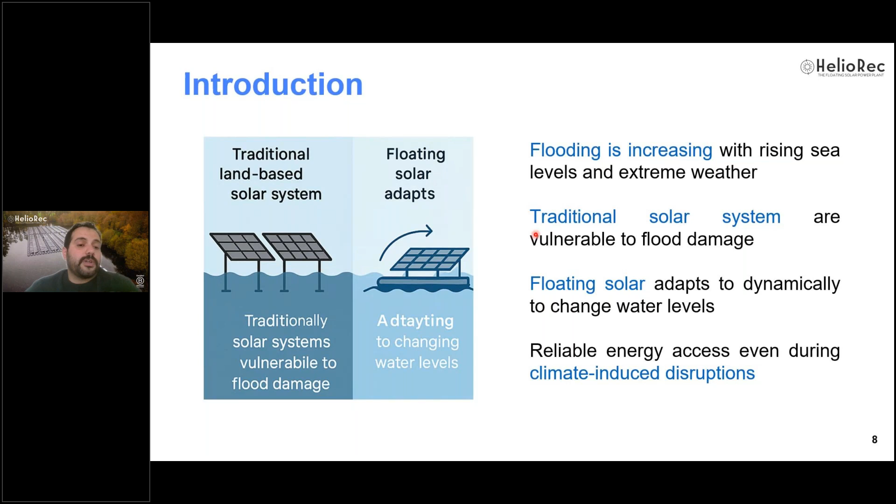So in fact, as climate change accelerates, we are seeing more frequent and intense flooding, especially in coastal regions. So that poses a serious threat to traditional energy infrastructure, including land-based solar installations. Whereas floating solar flips the script by using water surfaces, where these systems not only save land, but also adapt to water level changes in real time.

HelioRec floating platforms are designed and engineered precisely so they remain stable and operational during severe floods, ensuring uninterrupted power delivery. So briefly in today's presentation, what I want to present is a real case from the real world application of one of our projects, where we were able to produce clean energy in harsh conditions.

So in January, a couple of months ago, Storm Herminia unleashed record-breaking rainfall and severe floods that hit the region, mainly the Brittany region in France, where Rennes has experienced one of its worst floodings over the past 40 years. During that historic flood, our HelioRec platform, as you can see here in the red circle, remained fully operational, delivering uninterrupted electricity. That's real-world performance that highlights the resilience of our innovative floating solar technology.

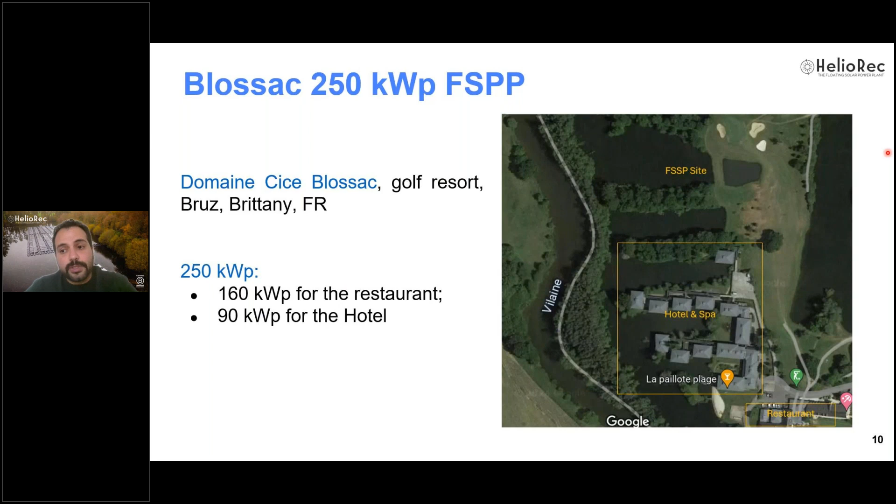Talking about the project itself, it's installed in Domaine Cice Blossac, a golf and hotel resort located in the region of Bruz in Brittany. The platform is 250 kilowatt, divided to supply the restaurant and the hotel of that place. The project was commissioned in October 2024, last year.

As you can see in this beautiful photo, the platform consists of the power plant with the floaters and the panels, the walking path and access bridge, and also floating electrical equipment which includes AC boxes, DC boxes, and inverters.

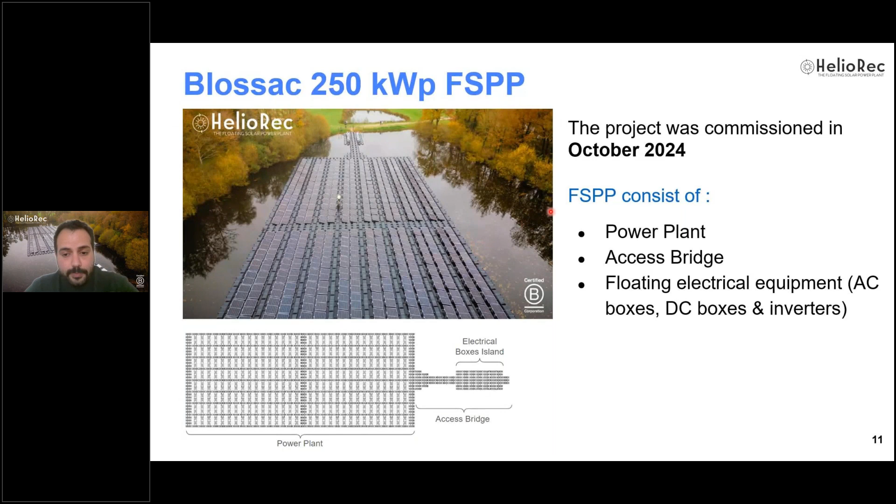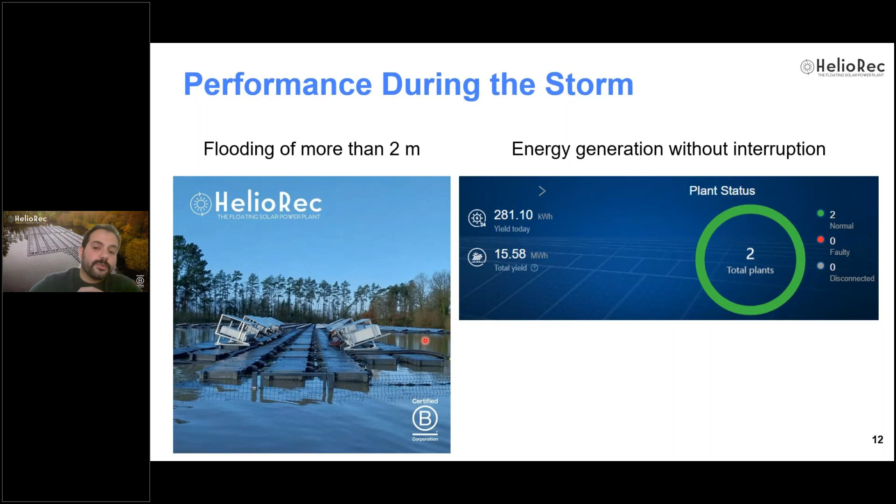Talking about the performance of that platform within the storm we mentioned before, despite the severe floods, a 2 meter flood on our platform, it stood strong. As we can see in this photo where the side gate is fully submerged with water, our floating solar power plant continued to produce energy without any interruption, and performance remained stable throughout that storm.

So I want to talk now about the main key technical features that allowed us to have this performance within that storm. But before I go to that, it's worth noting factors that already played a good role in the resilience of the system.

It's important to mention one important thing and give the essential credit that belongs to the proper design of the floaters themselves. Our floating solar system is certified with the Approval in Principle certificate by Bureau Veritas, and the main components and subsystems of our floating plant follow the recommended practice from DNV.

Coming back to the key technical features, one of the main key features is the environmental and site assessment before doing any project, which is the meteo data analysis. In that specific project, considering Eurocode 1 with a 25-year return period, the fundamental values are assumed for the basic wind.

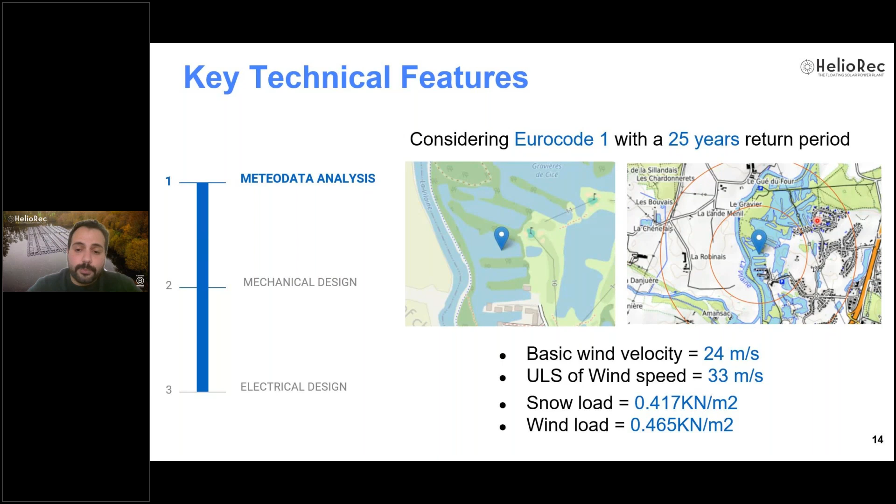The ultimate limit state of wind speed, snow load, and wind load are as shown here in this slide, where these conditions need to be taken into consideration within the design phase for load analysis, mooring design, and buoyancy verification.

The second key feature is the mechanical design of the platform. As you can see in the schematic shown before, here it's a top view of the plant showing the arrangement: 8 dual rows of floaters and 31 columns, split into 16 columns on the west side and 15 columns on the east side of the plant, separated by one column of a big footpath.

Moreover, the external rows and columns have also been designed using the footpath, the walking path, in order to increase the stability of the plant.

Moreover, the taper that you can see here, from the plant itself to the access bridge, this tapered transition has been chosen in order to strengthen the structure and mitigate any excessive lateral forces.

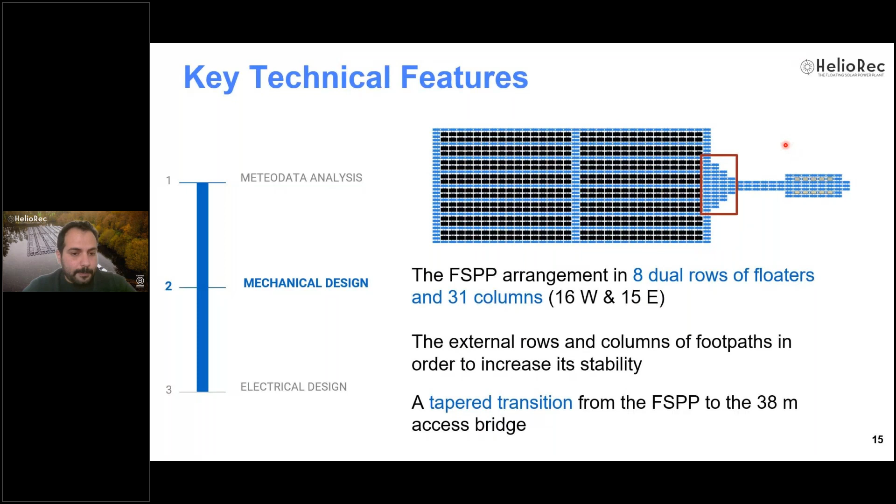Another important point in the mechanical design is considering the output, based on the output illustrated before from the meteo data analysis, where load analysis has been carried out using CFD analysis in order to understand the total load of the system and the total load it will be subjected to.

So the addition of all forces, shown here through the lines, the addition of all forces acting in a single direction across the plant is equal to the addition of the individual forces in each column.

So for example, the total load acting from the north-south of the plant is almost 58,000 Newton, including the forces on the access bridge, which is 2,800. A similar analysis was done for the east-west, west-east, and south-north directions. Following that, 36 ground anchors were distributed across the north, south, and east border of the lake, as shown in this schematic illustrating their position relative to the plant.

For the west-east direction, there was a small incidence of winds, less than 3 to 4%. Also, we didn't position any mooring anchors since the lake didn't have a border on its west side. That means any potential loads in that direction are taken into account by the ropes on the north and south borders, with an angle, as you can see here.

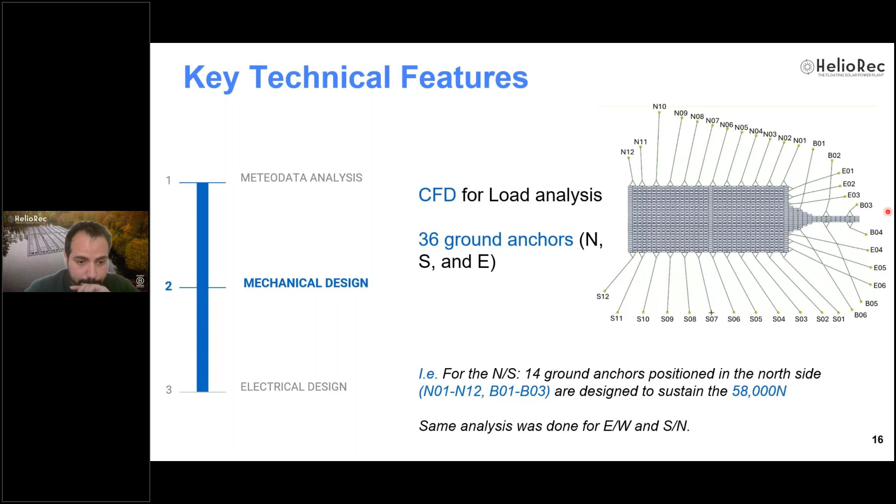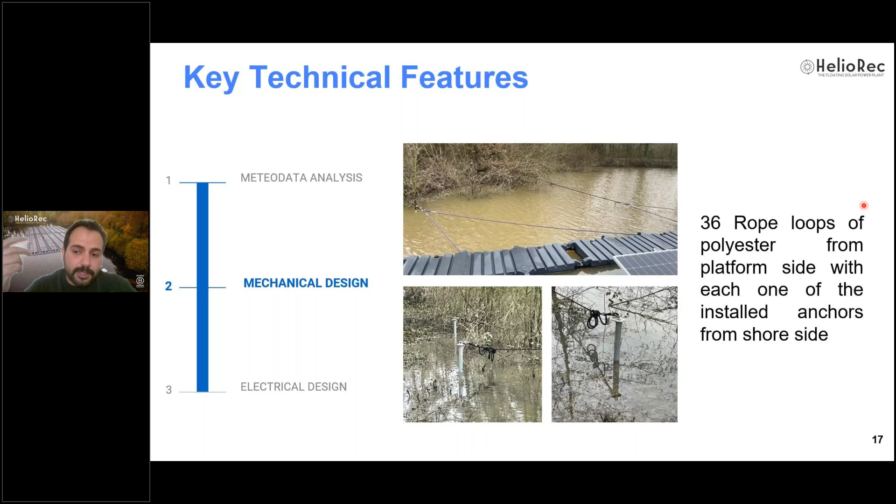The anchors were attached with eye bolt shackles on top of each anchor to support attaching the mooring ropes. On the platform side, as shown in the first picture, 36 rope loops with 12 millimeter rope were placed on the platform, crossing the ear of 2 footpaths, where the 2 ends were attached together with 1 shackle. The rope linking the 2 sides is set with a thimble on both sides and clips to hold the rope itself.

Another important point is the buoyancy check, which is important for system integrity verification. Considering the electrical protection floats on the plant, the simulation assumed a downforce resulting from wind, snow load, and dead load, and shows a positive net buoyancy for our components - 333 Newton for the footpath and 22 Newton for the floaters respectively.

Assuming a column assembly composed of 16 floaters and 9 footpaths, this results in a net buoyancy of almost 6,500 Newton, ensuring system integrity remains intact at worst case scenarios. For that reason, similar analysis was also run on the shelters hosting the inverters mounted on the footpath, considering wind loads and other loads, including the weight of the footpath, shelters, and electrical boxes.

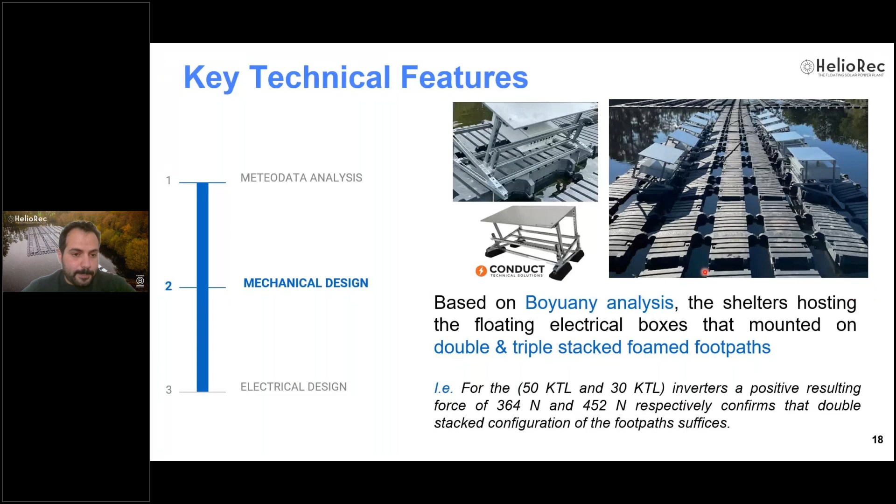Another important point is that the platform itself performed well during the storm, and we didn't have any interruption for the electrical components. All the conduits were grouped and organized at the start of the bridge, then divided into two sections for the west and east side of the platform supplying the hotel and restaurant. The AC cables were also passed to the platform on both sides with a conduit, with yellow buoys to accommodate different tide levels we'll face.

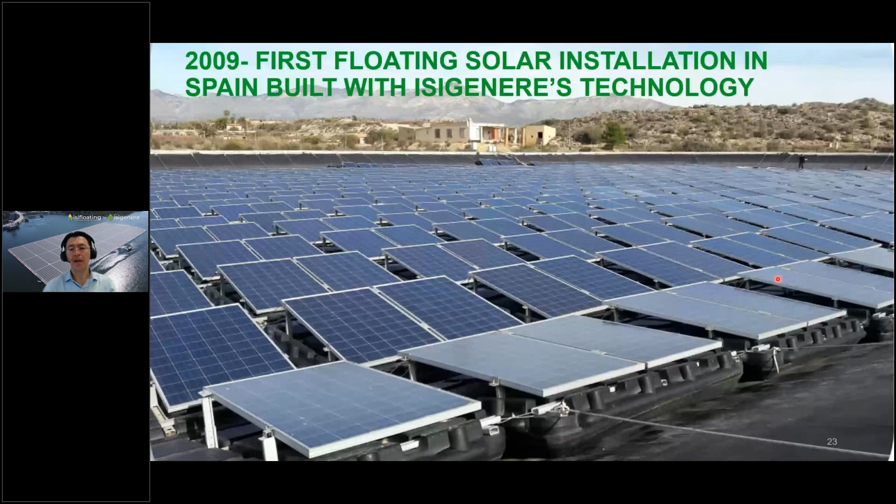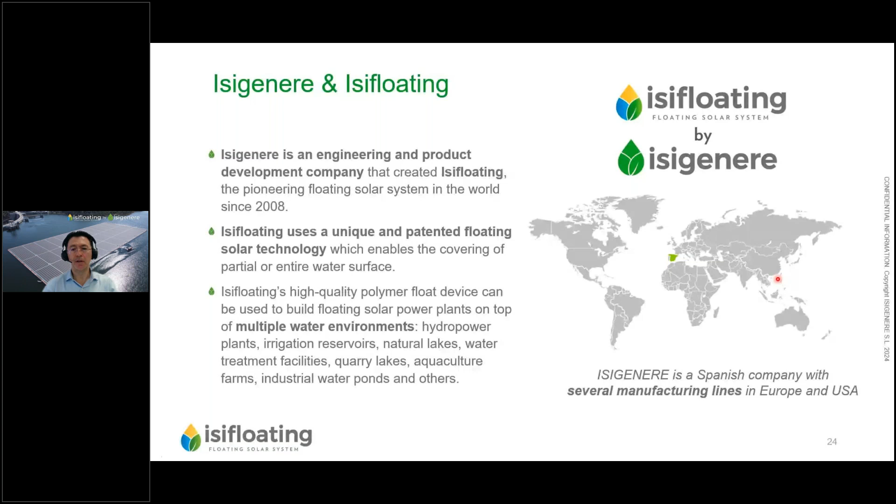As a company, we are a Spanish company doing the engineering and development of our product called Isifloating. It's a floating solar structure, and we have already used this in different types of reservoirs. We mainly work together with our partners, such as engineering companies and installers, to build the floating solar project. We are building an ecosystem of companies that will bring the benefit of floating solar to the end clients, working together with them and complementing each other in the expertise that every company has. In our case, the specialization is in floating solar structures and the anchoring and mooring solutions for the different projects.

Here you see some examples of the projects that we have built. What's interesting is that across different types of reservoirs, we already have more than 100 projects in 5 continents, and the projects have faced different challenging conditions.

As Dee said, it's amazing to see what's happening with the climate. Even in the past, we are breaking historical records every year in wind speed, water level variation, and waves. It's important to understand what is the level of risk and how we can mitigate that impact. I don't think it's possible to completely eliminate it, because weather is showing us that it can be very, very extreme, but we believe there are several things you can do.

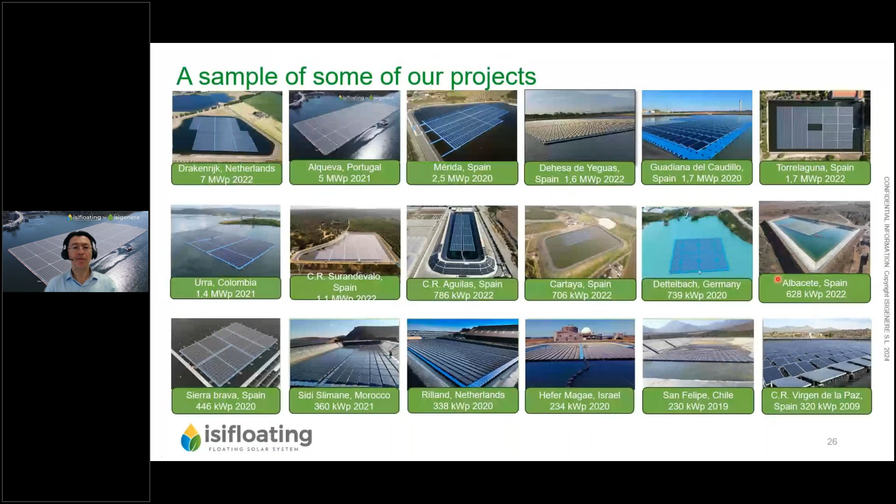You start by looking at what the complexity of that specific location will be. It's important to understand if the plant and the reservoir you're going to build in is in a really challenging condition, or more of a standard one. You need to look at things like water level, the winds, the flooding that was mentioned, and the snow, because all of that is going to put pressure and fatigue and can create challenging conditions for the floating solar plant.

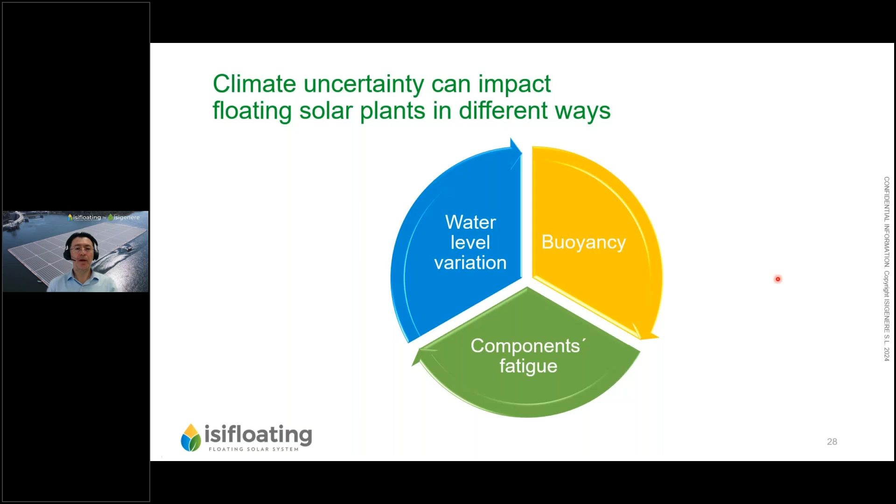Today I want to share our experiences mainly in 3 uncertainties that floating solar plants can have. The first one is water level variation, second is buoyancy, and the third is fatigue of the components. So let's start with the first one, water level variation.

Water level variation can look different ways. This is a picture of a project where the owner of the pond had told us that the water was never ever going to go lower than the black part you see on the top. For several years it didn't go lower than that, until a significant and extreme event happened, and they had to use the water, even though it was regulated, for human consumption and for crops, and the water level went lower than expected. In this case, the system was able to adapt, and it's flexible enough to bend on the slopes, even on top of the tubes where water enters and exits.

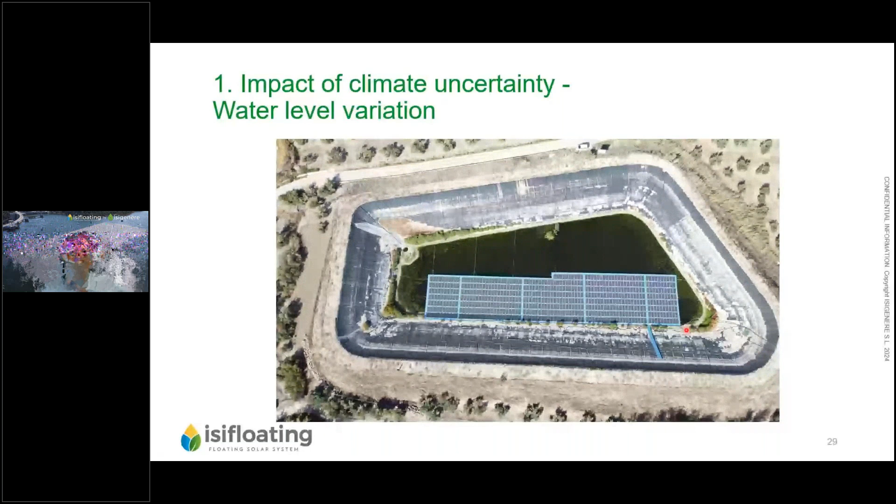You need to design the plant so that it will be able to cope with wind loads, wave loads, and current loads in a way that the plant will not receive mechanical stress. That's why we use elastic solutions in conditions where we believe there could be significant water level variation. We are working together with Seaflex.

This climate change uncertainty, especially in water level, can also happen during installation. You never know what the water level will be when you're doing the installation, and you cannot control it most of the time. So you might end up needing to build expensive platforms that you're only going to use once, and this could cost tens of thousands of euros.

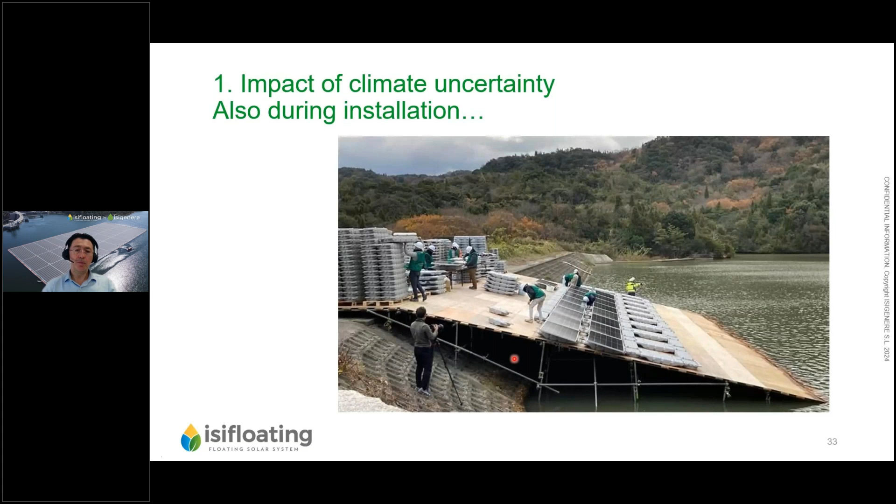So you need a solution that can be flexible, so the structure doesn't need a minimum slope entrance when the floats go into the water. We found a solution where we attach our floats with flexible joints made of fiberglass and nylon. They can almost bend to 70 degrees without breaking.

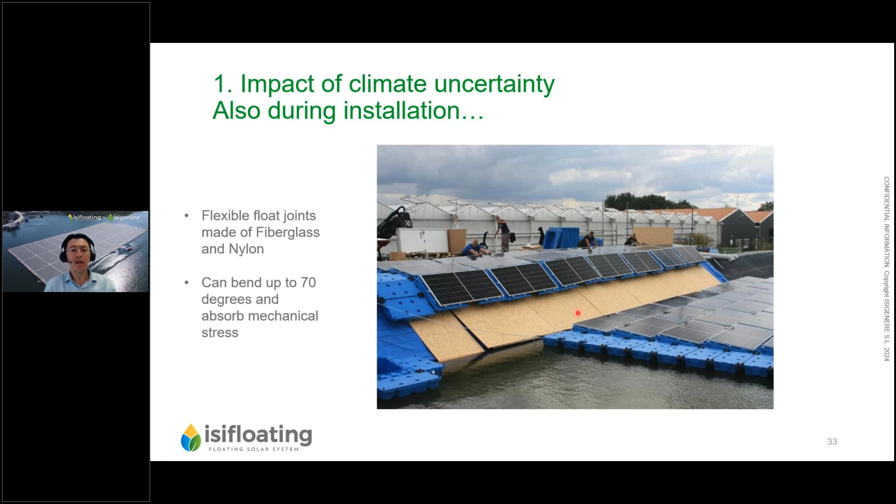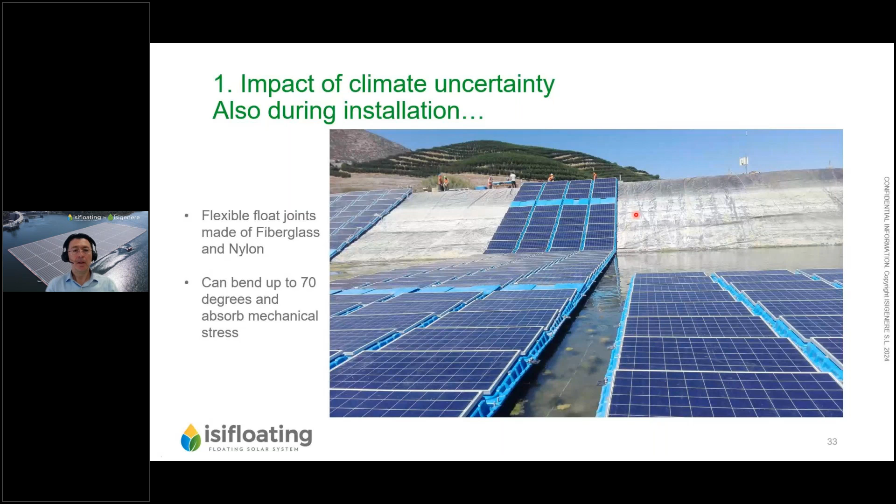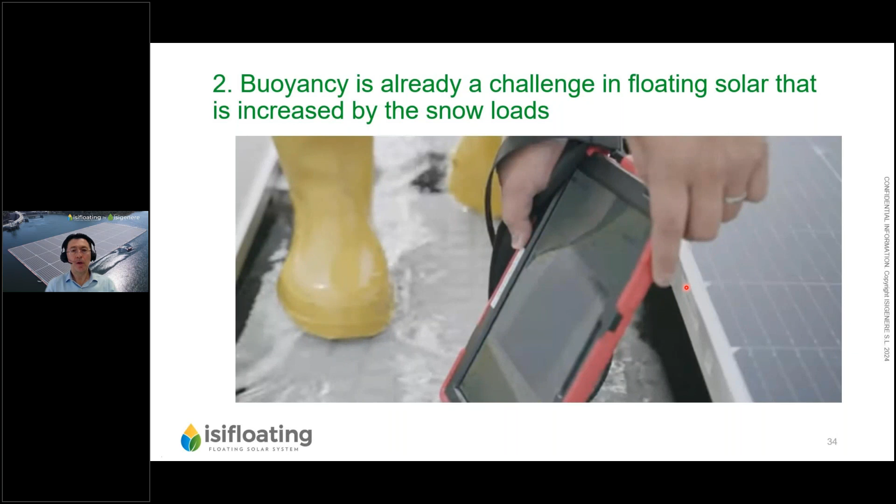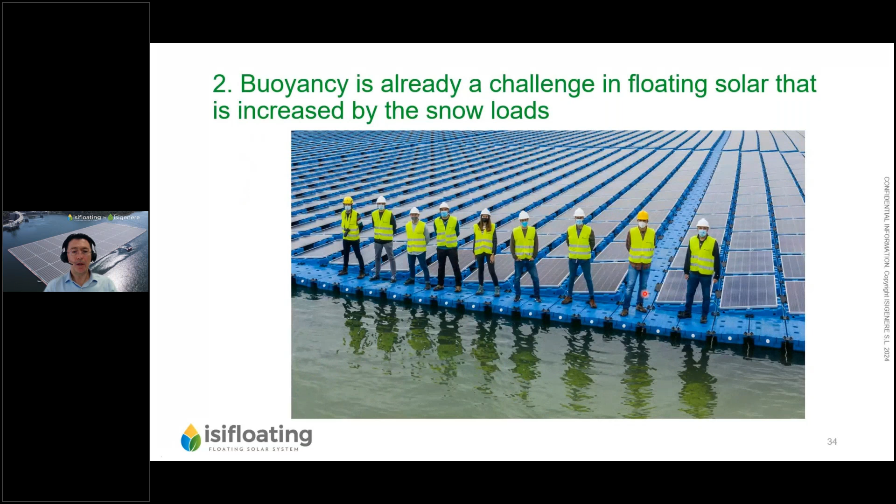You don't want workers doing maintenance and changing electrical equipment while touching water. So it's important to design at the beginning with bigger floats for higher buoyancy. Here you can see how 9 people can be working right next to one another, and there's still space between the maximum level of the float and the water. It's important to design with enough buoyancy.

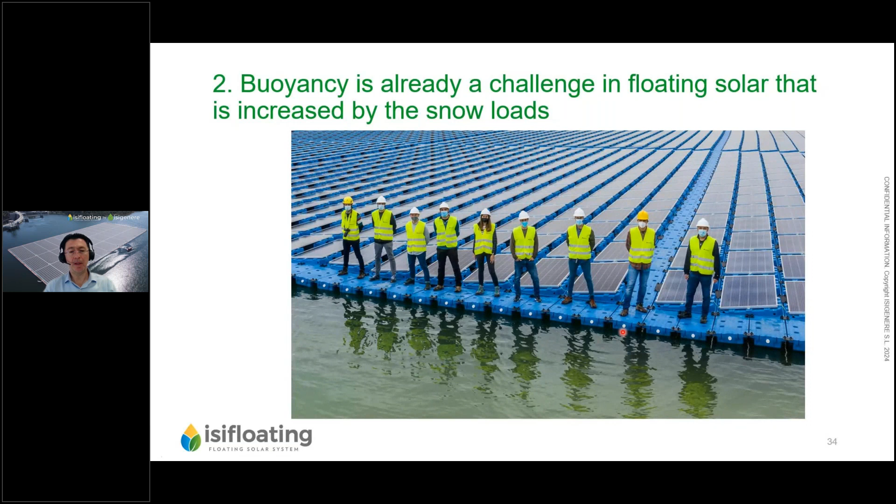I know there's sometimes a lot of pressure from clients to reduce capex, but it's important not only that the capex is efficient, but also that the opex is efficient and safe for workers. If you don't have enough floats, it's probably not going to be very easy when the snow arrives.

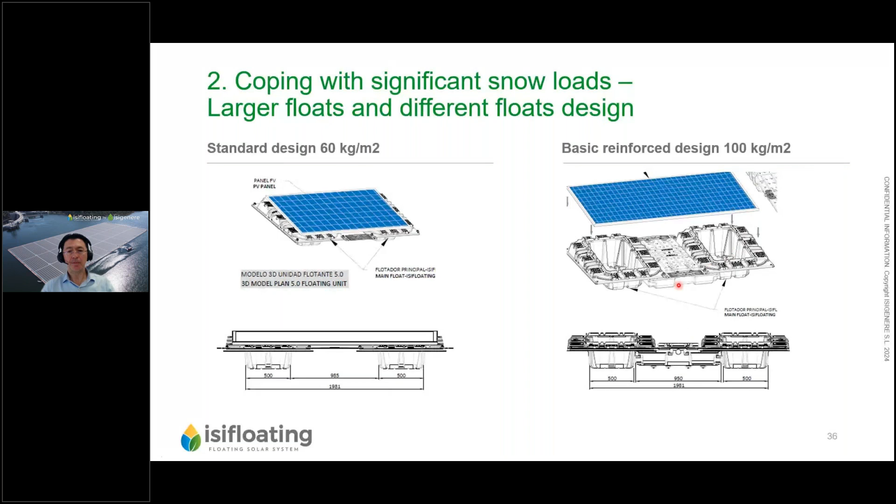Well, first, we have different types of float design. On the left you see our standard design where every PV panel is supported not by one, as in certain floating solar plants, but by two floats. This already gives you an idea of the higher buoyancy the system can support with heavy snow loads. But in places where there could be even additional snow load, what we do is reinforce the design. If the standard design can go around 60 kilos per square meter of snow, with the reinforcement you can go to more than 100 kilos per square meter. In this case, you have an additional float that is below the PV panel, and it's much more resilient from a snow load perspective.

So in the design, what else do we do? For the snow, it's important to remember that snow is just a buoyancy issue, and this is physics. The more snow, the more float, the bigger the float that you need, because this is Archimedes' principle. So you need to do it in a way that will be able to sustain that extra load.

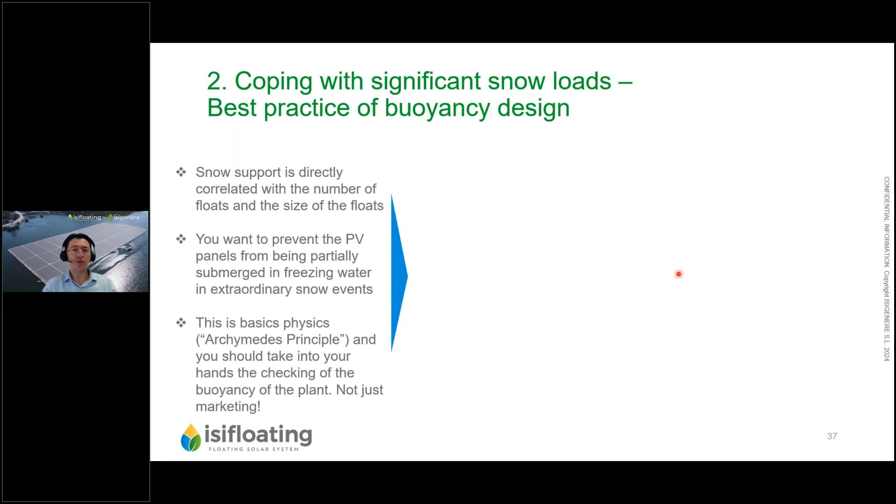Our recommendation is that you do your own calculations on what should be the net buoyancy of the system, starting by calculating the gross buoyancy, taking into account the different types of floats, how many you have in the system, and the buoyancy of each of those floats. You add the total buoyancy and you get the gross buoyancy.

Then you need to deduct the weight of elements, for example the PV panels, also the floats and all the metal components supporting the PV panel, to get the net buoyancy. Once you deduct that, you have the net buoyancy, and then what you need to do is divide the net buoyancy by the surface that the plant is taking. Then you get how many kilos per square meter you're going to be getting for the plant.

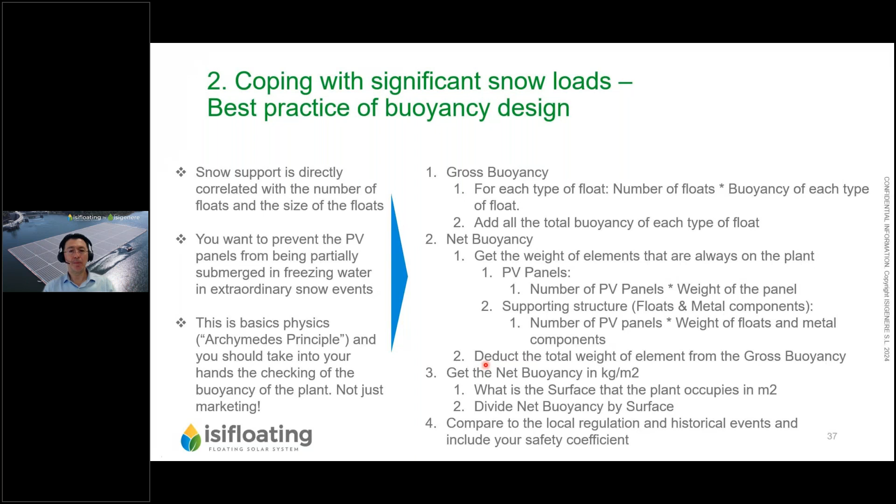So it's important that you make that calculation, including the safety coefficients, together with the engineering company or the float supplier company, to make sure you feel comfortable that the plant will be able to manage certain extreme events. So we have talked about buoyancy. Let's go to the third point, the fatigue and loads on the components.

It's true again that weather is becoming more extreme. The Eurocode is a reference for us, but even though the Eurocode in many places in Europe says that maximum winds will be around 100 kilometers per hour, we have seen plants facing 140, 150 kilometers per hour in extraordinary events. So how are we coping with those situations?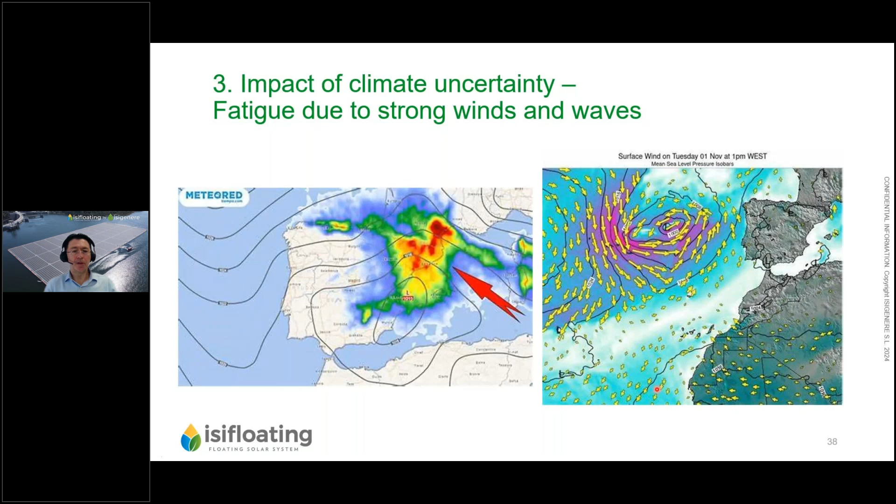The first is to try to design a system that will be as aerodynamic as possible. What we are doing is reducing the tilt of the PV panel. We started 15 years ago with 10 degrees, but now we are at 5 degrees. We have also closed the back of the PV panel with the float and the structure, so that when the wind hits, it's not hitting a sail. The PV panel can become a sail, but instead it's hitting a wall.

When you compare that to other configurations at a higher tilt, especially when the back of the panel is open, the CP factor that engineers calculate gets increased a lot. A 5-degree closed canopy is about 0.48, while in this other configuration it will be 2.1. So just the design can increase the wind load by more than 400%. This increases a lot the forces that the structure will be suffering, and it might happen not only once, but several times over the 25 years of the plant.

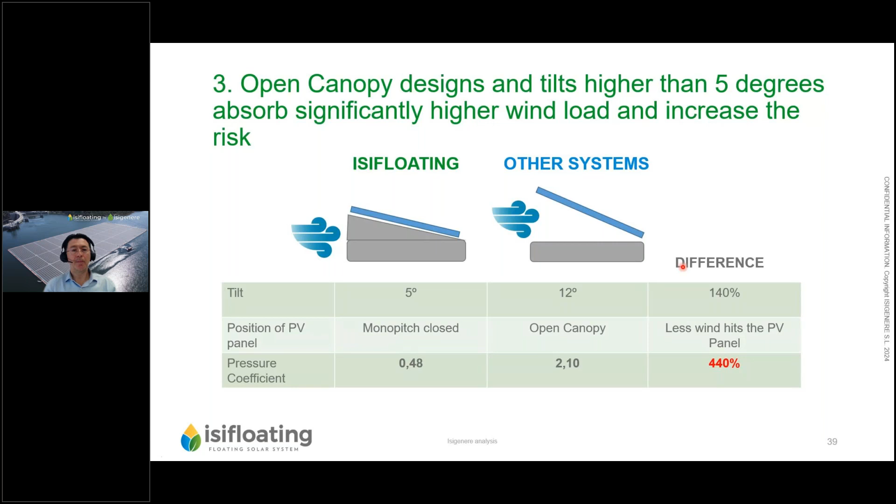The next item to keep in mind is related to the fact that the wind will create waves.

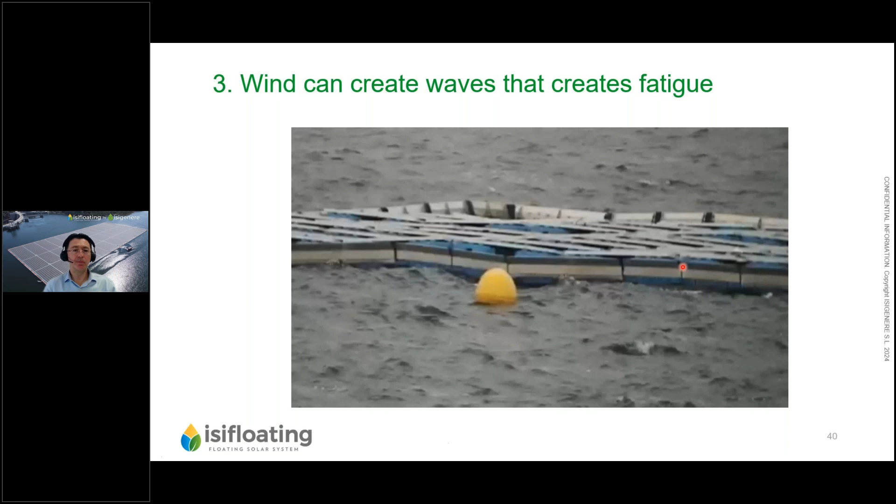Depending on the fetch of the reservoir, it can be small or big waves. But even the waves that are 10, 20 centimeters, they can create fatigue. In this video, you see this is a lake that is not too big, but when you have light winds, you see all the movement that is already happening in the floating solar plant, and this can create significant fatigue in the elements.

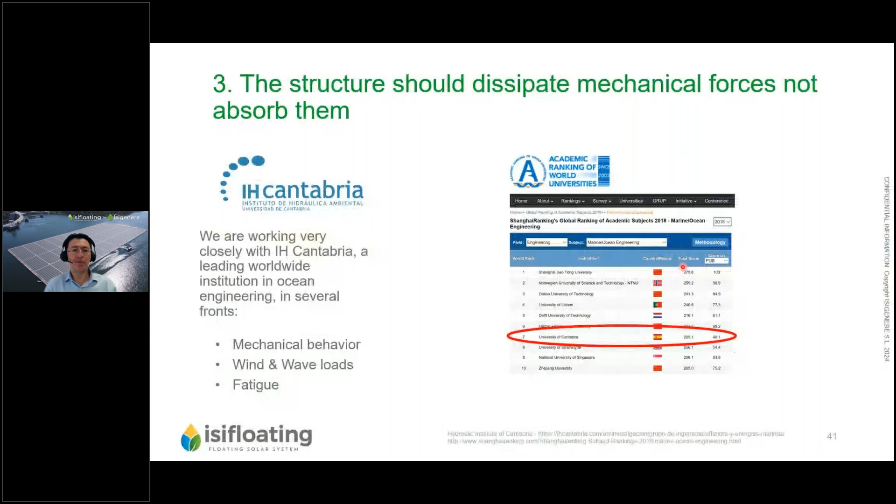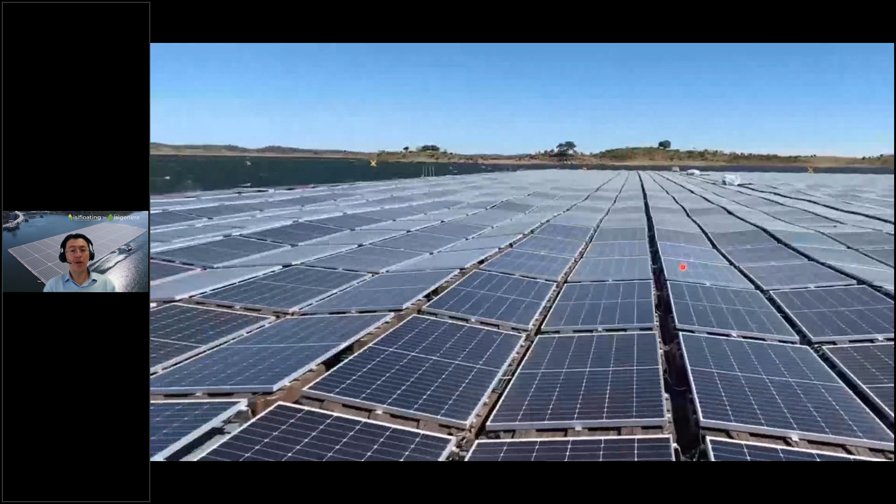Sometimes, if the waves are not too big, you can manage with a configuration with extra floats. But if the waves are significant, like in this case, in a plant where the design parameters could be almost 2-meter waves, you need to include additional components like breakwaters. You can see here on the upper part, these are not floats, this is a pontoon that has the possibility to break the wave and reduce the wave effect.

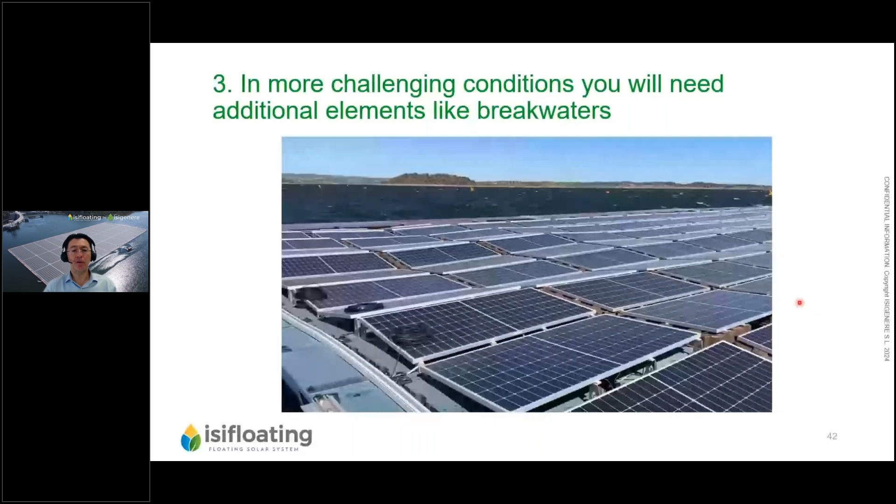It's important not just to talk about the large waves, but also the smaller waves, because even with the wave breaker, I'm playing the video again, you can see all the movement that is happening inside. So this is very relevant in dams, in big lakes, where the fetch is long, and you might need extra protection to eliminate the fatigue effect in the components.

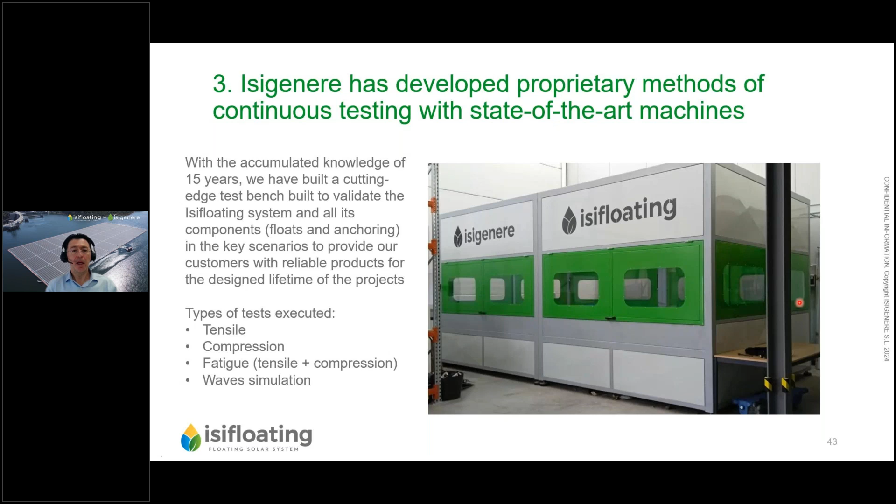The other part that is relevant is testing and doing a lot of tests, because yes, you can install it in complex projects, but it's important to make sure that you have tested with a lot of cycles of fatigue. And we have developed our own test bench and testing tools so that we can simulate complex situations like this one with waves.

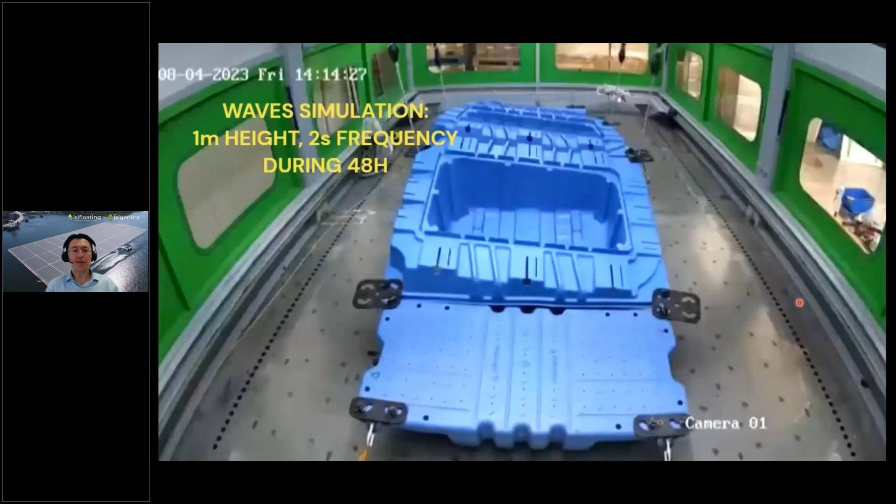Here we're simulating 1-meter waves, with 2 seconds of frequency, and we are doing this for 48 hours. So we are looking at what's happening in all the components, and after the test, we will retest each of the components to see how they are behaving for strength, tension, and all the key variables you need to make sure the floating solar is working correctly.

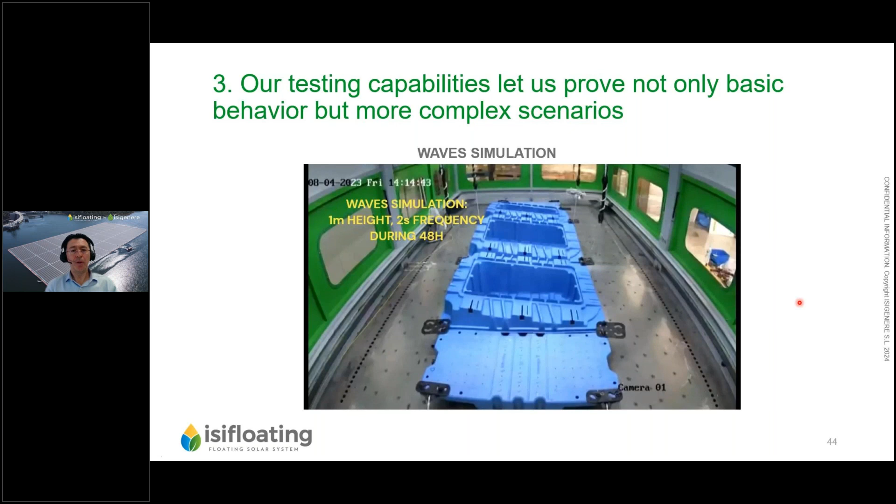So these were the three main topics that I want to discuss about weather uncertainty. Please keep in mind that as the weather is becoming more extreme, you need to think about some of those issues and how you can reduce the impact. And we are very open to continue the conversation with you to make sure that you have very successful floating solar projects.